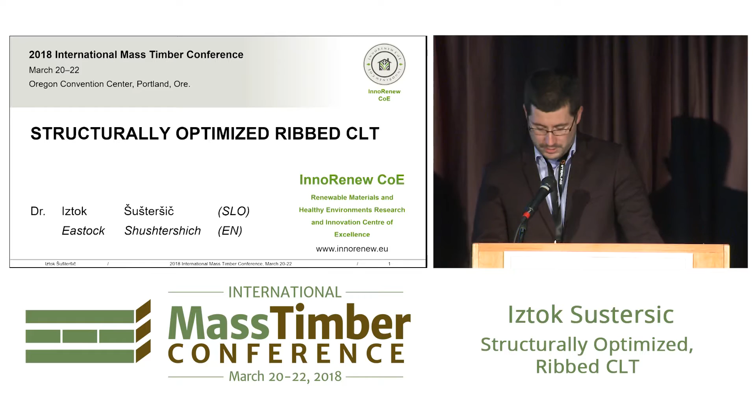I'll start with quite a bold claim. I think that Xlam needs to change at least a bit. I think it needs to be optimized, and I actually think it needs to be rationalized. Saying something like that about a material that was perhaps solely responsible for this mass timber renaissance we've been seeing for the last decade or so is quite daring. Bear with me, I'll try to explain where I'm coming from.

We perhaps should go back first, to the beginning where Xlam actually started, which is now almost 25 years ago, basically in the mid-1990s, sort of as a joint research between the Austrian industry and academia. At that time, timber in Europe was a lot cheaper than it is now. It was more available. The beginnings were a bit slow, but then at the beginning of the new millennium, the whole thing took off quite a lot.

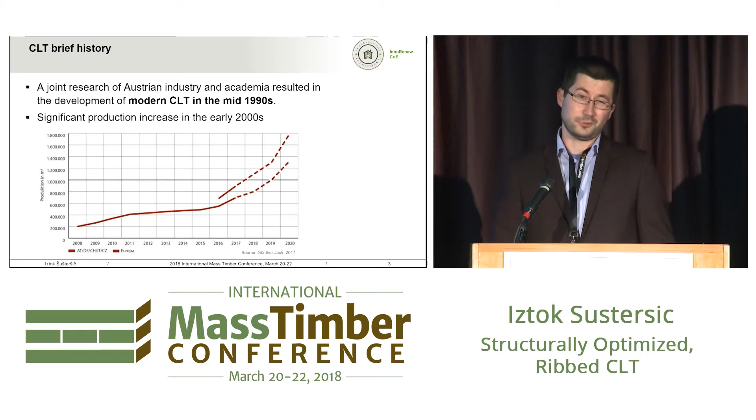If we look just at the latest numbers in Europe, we're seeing that the European producers are probably going to be hitting the 1 million cubic meter mark either this year or next year. So that's a lot of timber. That's a lot of trees also.

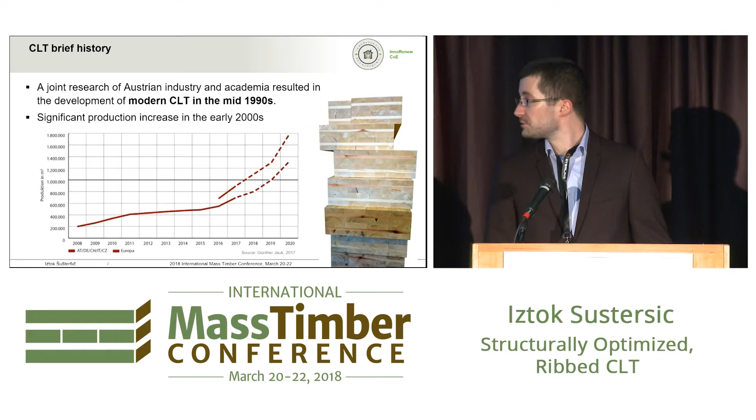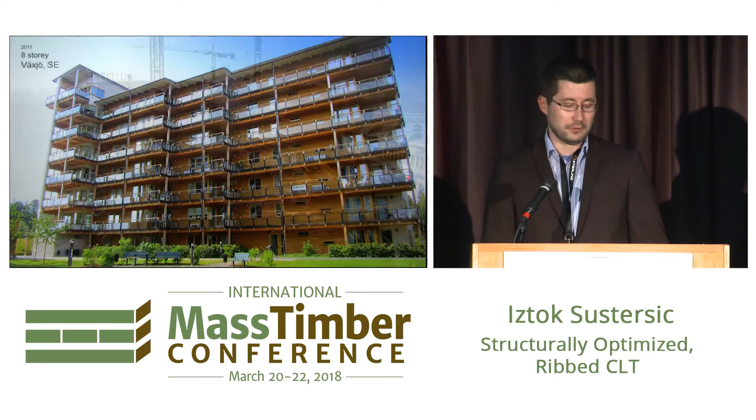The reason why perhaps CLT took off so much, like 15 years ago or so, was because it allowed us to build in height. Perhaps this building was the most prominent one in that perspective, so the first 8-story CLT building in the world, in Växjö, Sweden. And then after that, they just started sprouting all across Europe and the world. 9 stories, 10 stories, that hardly even gets to the news these days. You also have the 17-story one in Vancouver, Canada, the Brock Commons, and the 24-story one being built right now, the Hoho building in Vienna.

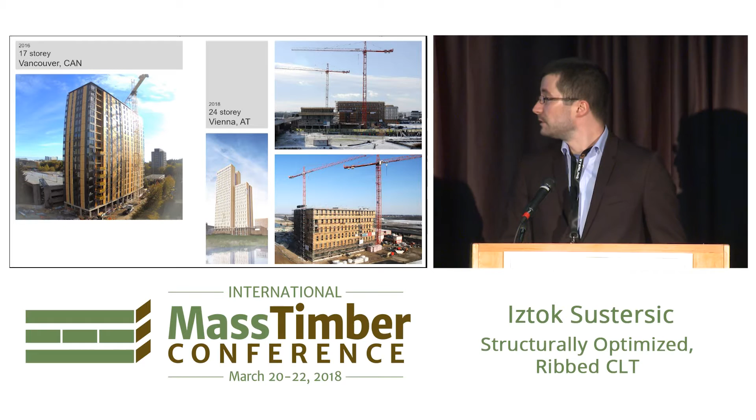I'm slightly cheating with these two because they are hybrids. They have concrete cores, which take the lateral load. But nevertheless, they have quite a lot of CLT within the structure itself. So it's not only that we can build high with CLT, we can also use it for the inner panels. We have a nice, healthy, warm building climate.

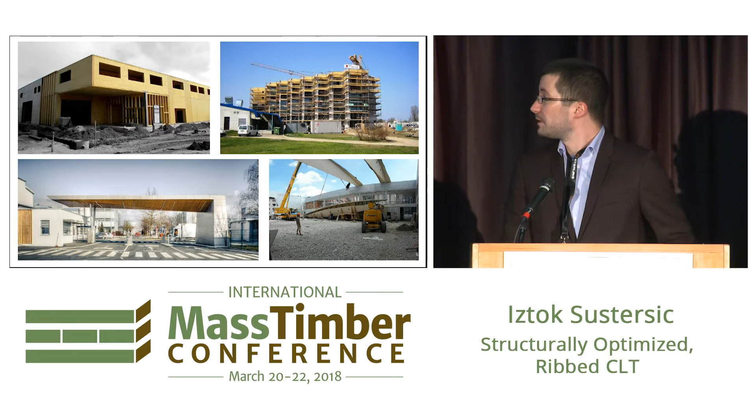We can also use it for smaller applications, but for some more interesting architecture, for structural upgrades in seismically active areas, because it's so light in mass, but stiff on the other side, for cantilevers, for all sorts of things. So coming back to my original question, or my original bold claim, why should we rationalize Xlam?

Well, a medal always has two sides, so we also have to look at the other part. There was a very prominent study made by Johnson and others in 2011, whose outcomes were, in the end, that we will have more of the low-quality timber in the future. We'll be using more plantation wood, and that we may actually see spruce start to run out as soon as 2020. Now, the last one is a bit of an overkill, so we still have some spruce, but we are definitely logging a little bit more than we should.

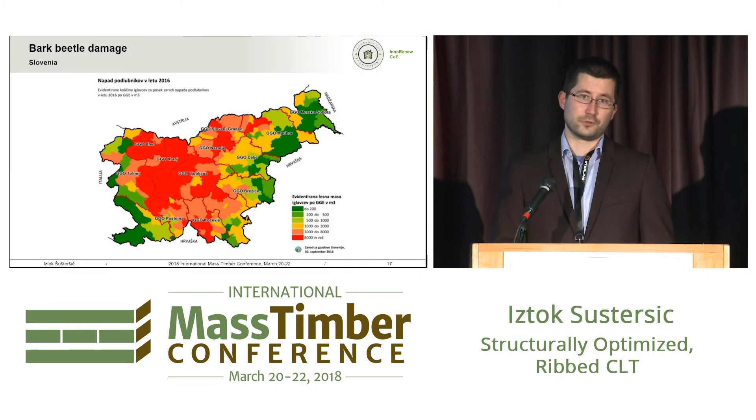So it's not only what we're doing in the forest, it's also what's happening in nature itself. For example, a case from Slovenia, the country, it's actually the 3rd most forest-covered country in Europe, right after Finland and Sweden. That's also the country where I come from, and for that matter, also where your first lady comes from. But putting that aside, 4 years ago, we had one of the worst cases of sleet probably ever. That resulted in this, and that consequently ended in this, the worst case of bark beetle damage in the last 30 years or so.

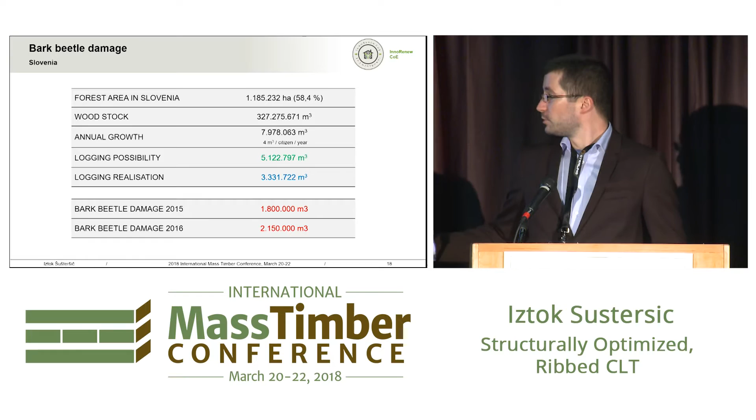Putting that into numbers, we've lost about 60% of our yearly logging realization for the last 3 years straight. I don't have the data for 2017. The word is it's even larger than it was for 2016. So in addition, it's also the timber stock that's changing.

This is a case from Germany. So right now in Germany, we have 70% of softwoods and 30% of hardwoods.

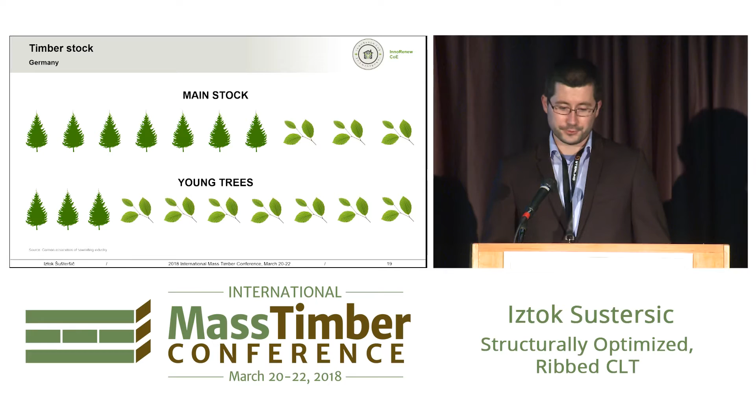But the young trees are quite the opposite. We have 30% softwoods and 70% hardwoods in the young trees. The same case also then results in the prices of timber.

This is the price of spruce and pine for the last 25 years or so, and this is the price of beech, which is actually declining. So, taking from this, we may actually see quite a lot of hardwood being used in the future.

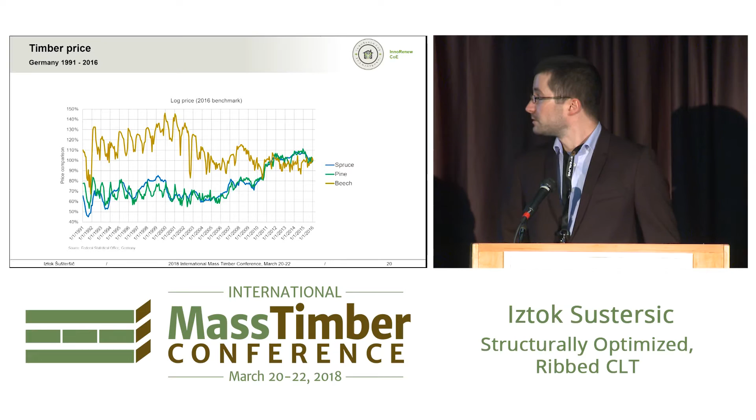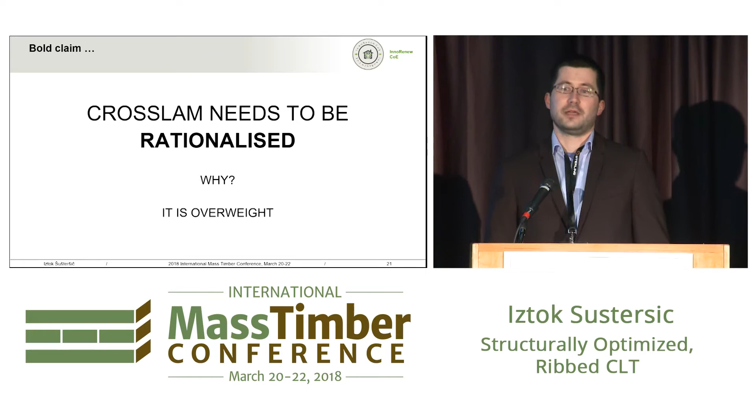But when I say that crosslam should be rationalized, I don't just mean we should change a species from spruce to beech. I think crosslam is a bit overweight, and I think it actually needs to go on a diet. So the question is, what happens if you go on a diet?

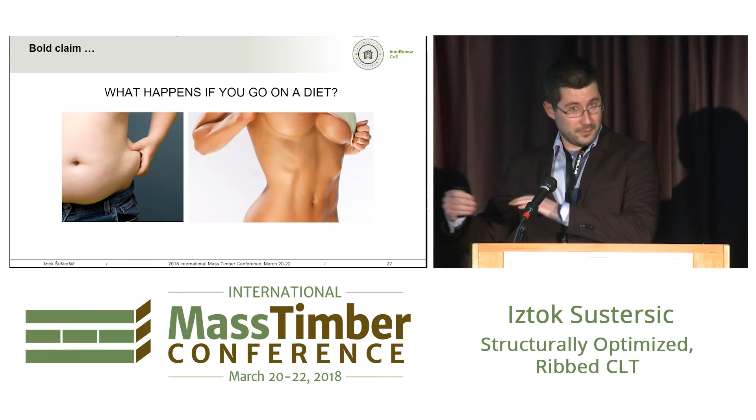Not the upper part, quite the opposite happens in that department, but you can see your ribs. So the trick question is, what happens if crosslam goes on a diet? Yes, it too starts to show ribs.

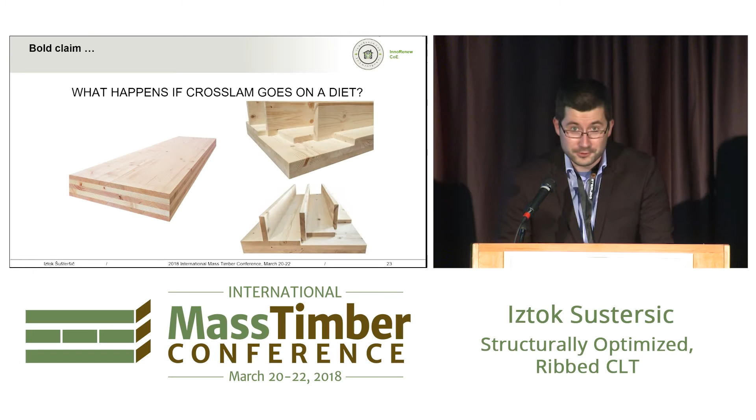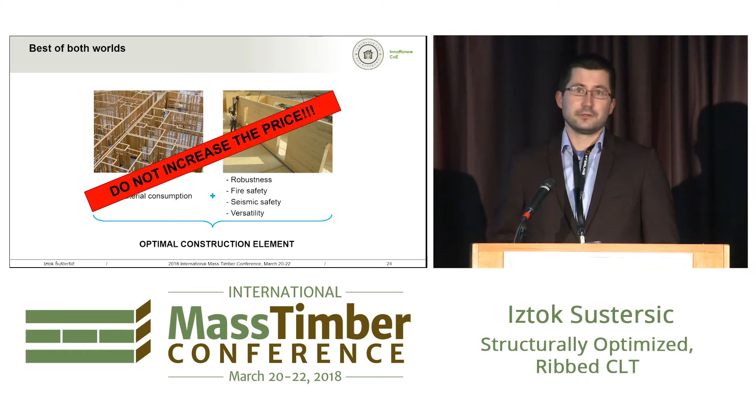So the thing is, when we were trying to come up with this new element, we tried to combine the low material consumption of stick frame on one hand with the robustness, fire safety, seismic safety, versatility, strength, stiffness, etc. of crosslam on the other hand, into this one optimal construction element without increasing its price.

And how to do that? First of all, we had to keep the production cost the same. Second of all, we wanted to use the same materials as for regular crosslam, so basic, simple lamellas.

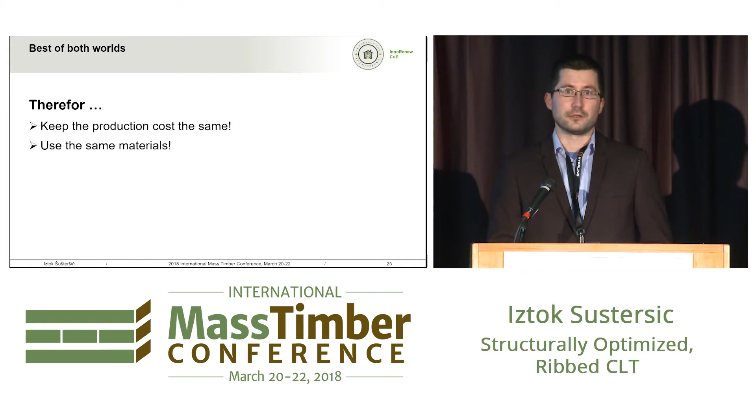Because these cases, this was done before and this is being done now. So taking a CLT slab, combining it with a glulam or LVL, whatever rib, this is nothing new. But the problem is you have to make one, you have to make the other. These are usually not made in the same factory.

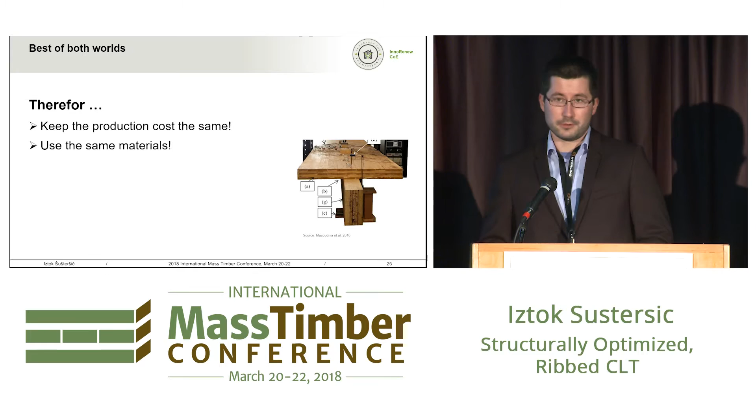You have to bring them together. You need labor, manpower, transport, etc. So this was out of the question.

And second of all, these elements are more useful for larger spans, let's say 10 meters or more. So that would be roughly 35 feet or more.

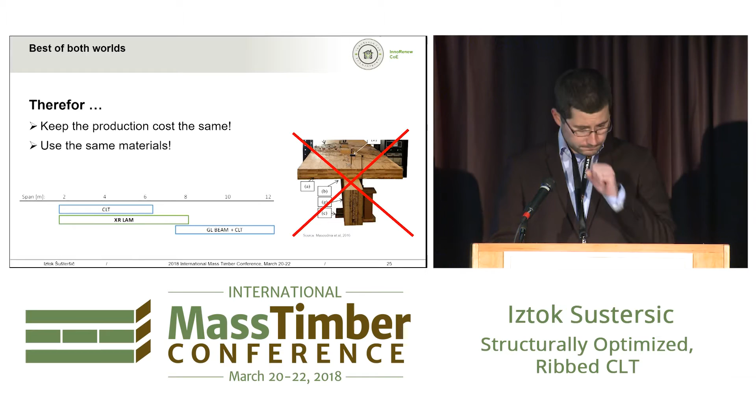And we were aiming for the 6-meter spans, so again roughly about 20 feet or so, where crosslam is actually quite optimal. If you go beyond 6 meters, you can do it without a problem.

The thing is, if you want to fulfill all the serviceability limit states, you're getting quite thick plates and you're not being as rational as before. So sticking with the 6 meters, perhaps trying to push it a little further, maybe towards 8 meters or so.

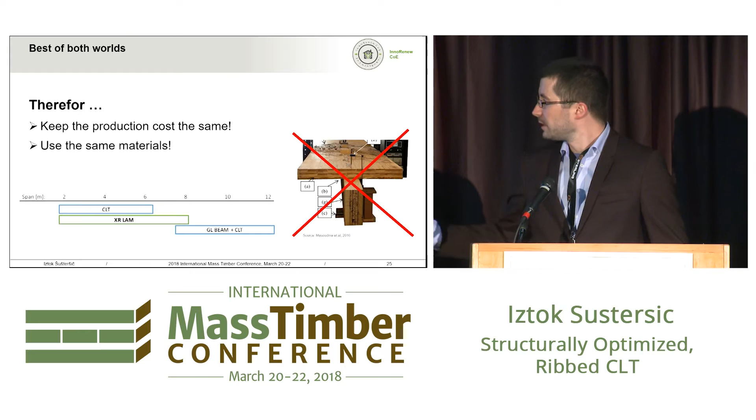And first of all was to develop this one-step production procedure, so how to incorporate the ribs into the main CLT structure.

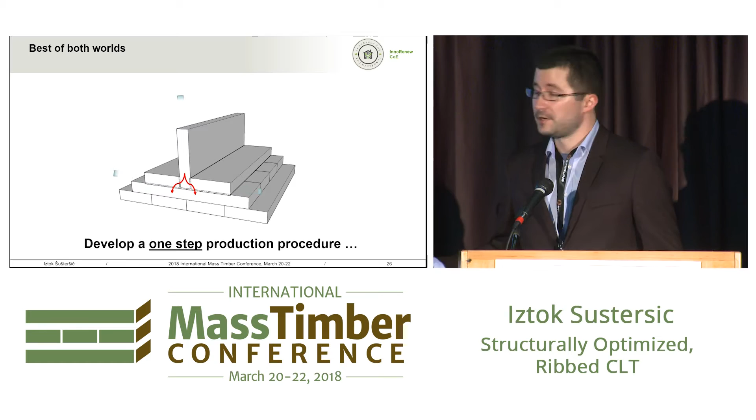Well, we did this by actually using a two-sided pressure, so from the sides and from the vertical direction. In the end you get this very stiff, very robust connection, even if you have very slender and thin lamellas.

Second of all, it was the use of standard lamellas. You can imagine if they're very long, very slender, they can get a little crooked. So if you have this side pressure, you can actually straighten them up and get this very compact and robust structure in the end.

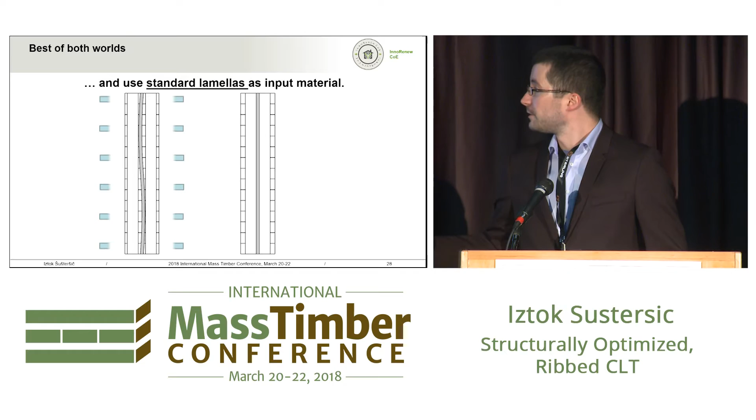So of course we had to put our money where our mouth was, and we made this testing matrix. Altogether, when you combine the cross sections, variations, lengths, and so on, this was about 39 specimens altogether. These were meant for bending.

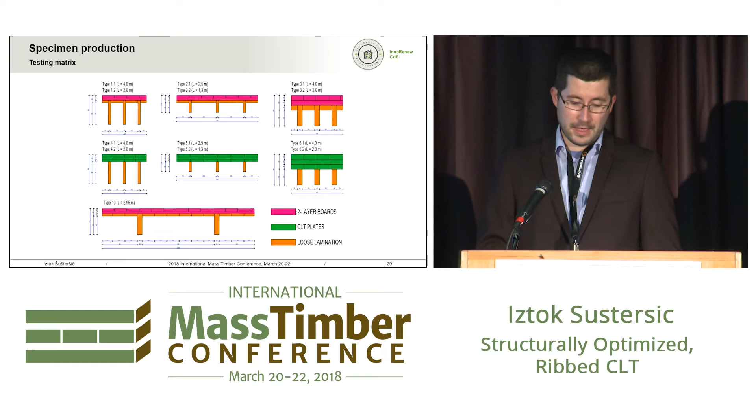This was then meant to be as a wall for buckling, and we made them on a Ledinek X-press. So this is a press that's actually already on the market.

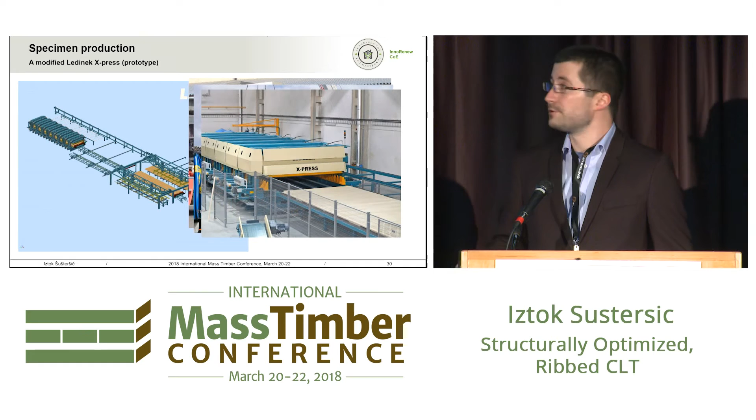It's a modular press. The main thing is that it actually allows pressing from 3 sides already - the main vertical pressure, but then you also get the side pressure and longitudinal pressure as well.

The problem is that all the presses are usually custom made, so they're not lying exactly in the backyards of producers. We were really fortunate that Ledinek had one of the segments - not exactly lying in the backyard, but they had one, and they were kind enough to modify it for us.

So we were able to make specimens up to 4 meters in length and up to 1.5 meters wide.

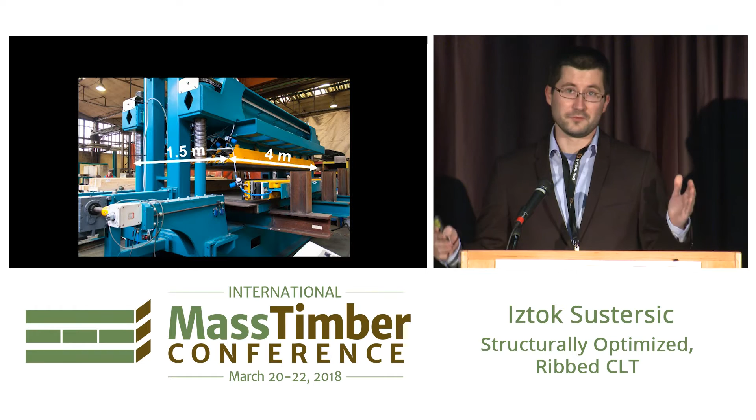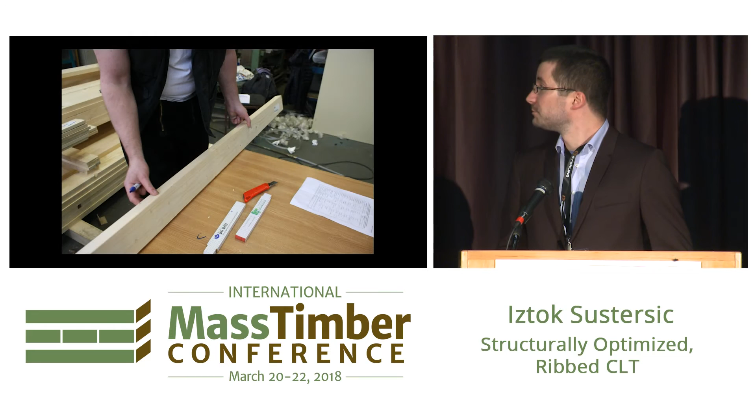So we started with all the procedures for the basic lamellas. First, we had to regrade them all and measure all the properties to get the correct modulus of elasticity, so we knew the properties of each and every lamella. This was very important for later finite element modeling.

After doing that, we had a couple of rejects, but the rest of the lamellas were classified into three different classes: the stiffest ones, the medium ones, and the most flexible ones. We tried to spread the properties across all the final samples so we had as uniform samples as possible. These were little bundles.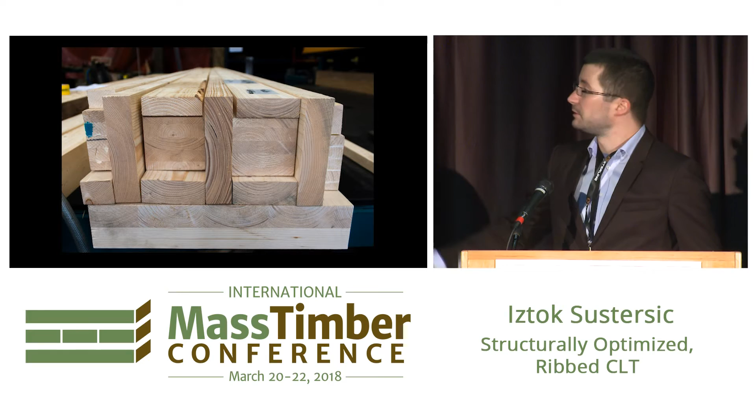You can see the bottom side of the compression plate, the ribs, the flat lamellas, and these so-called dummy elements that ensure the vertical pressure also reaches the flat-lying lamellas and not only the ribs. We used polyurethane for gluing, which is pretty standard in Europe. Then we put our little packages into the press, pressing them from the top and from the side, and they started coming out in all different shapes and sizes according to the matrix I was showing you before.

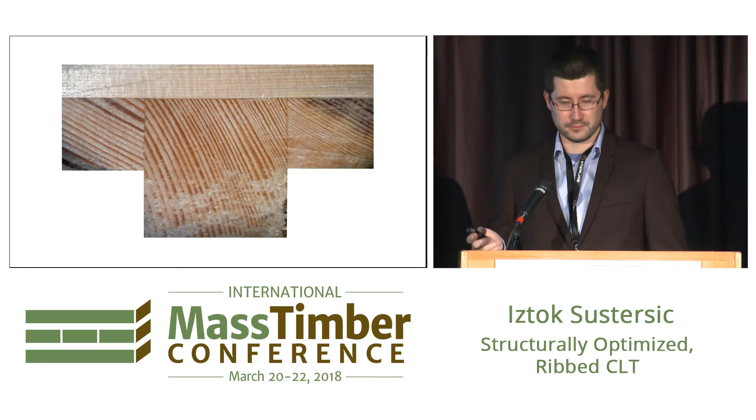So this is a very, very stiff, very robust joint. Even if I have a super slender lamella, even if it's like an OSB plate or whatever, this is a lot easier to put together and to have a stable connection. Because if you try to glue a very slender and narrow lamella directly on the CLT plate, it's going to give you at least some gray hair, if nothing else.

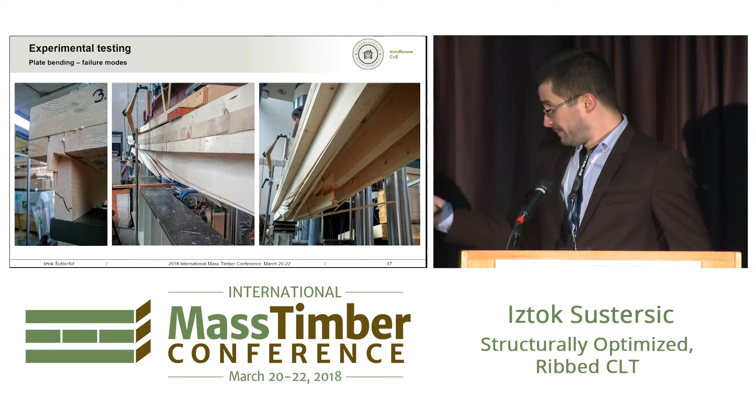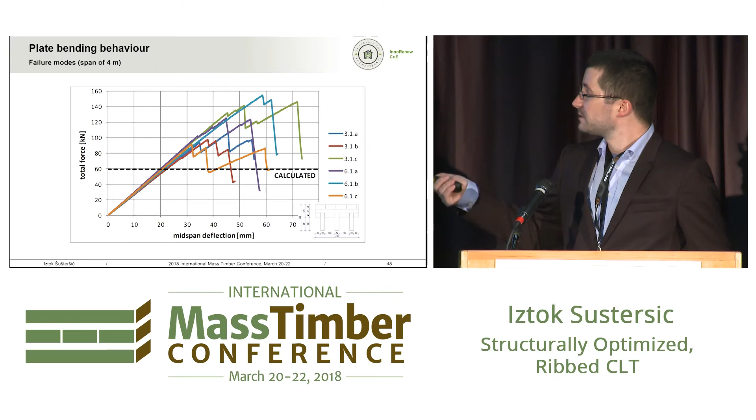If you look at the displacement force diagram, you see this: the load starts to increase, then one of the ribs breaks, the load is redistributed to the other two, then starts to increase again, the second rib fails, and again redistribution, and so on. In the end you get this zigzag pattern of the load displacement curve, basically a sort of ductile post-critical behavior.

This is very uncommon for timber structures in general. Glulam beams, whatever, massive timber - when you stress them, they usually fail pretty much in one go without any sort of ductility, so brittle failure. This was quite the opposite in this case.

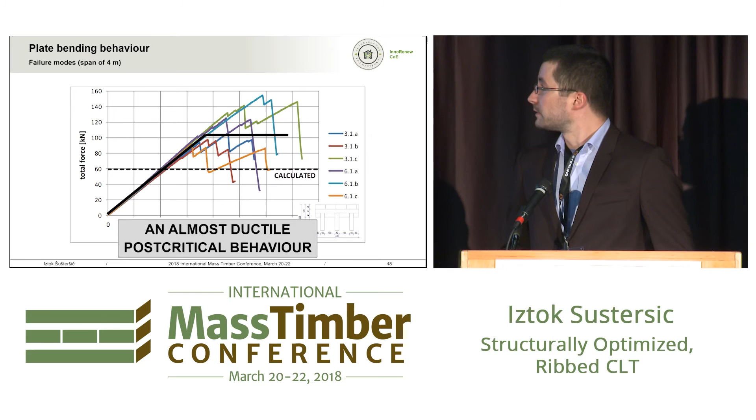One thing we also found out was that there was no distinct shear lag effect. Whenever you have a rib-type plate or any T-shaped section, you always have the presence of shear lag. In our case, the ribs are actually so close together that there is no such shear lag present.

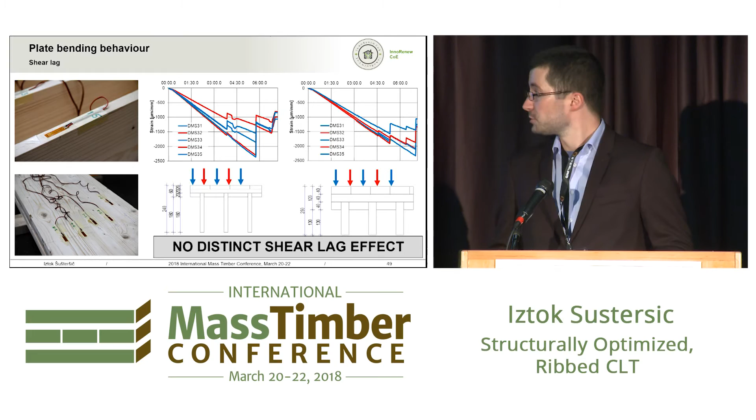There was a difference in the measurement of strains on the top of the compression plate. However, this was more or less correlated to the different stiffnesses of the ribs we were intentionally putting there. So there is no shear lag effect, which means we can use the complete cross-section without any reductions - we can use the full potential of the material.

Okay, coming to walls. This wall specimen was 2.95 meters tall, which is quite standard for Europe because this is the limit for our standard transport, so we don't have to use special lorries. It was 1.25 meters wide, the standard width of OSB plates in Europe. Only the plate was supported, so the ribs only offered buckling stabilization.

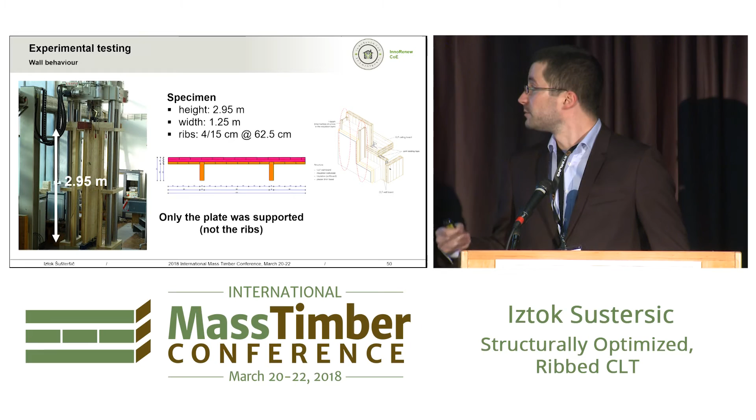Now, speaking of ribs, whenever you're dealing with CLT construction, unless you have a contact facade, you usually end up with some sort of rib or rib-like elements because you need them to carry the substructure of the facade. Normally you have to buy them separately, bring them to the construction site, install them, etc. In this case, they already come within the package itself.

So, coming to testing, this very small specimen, which actually has 30% less timber than a standard 10 centimeter CLT plate - the most common plate used for walls in Europe - could take 1,100 kilonewtons of force. If you translate that into length meters, that's close to 100 metric tons per length meter of wall.

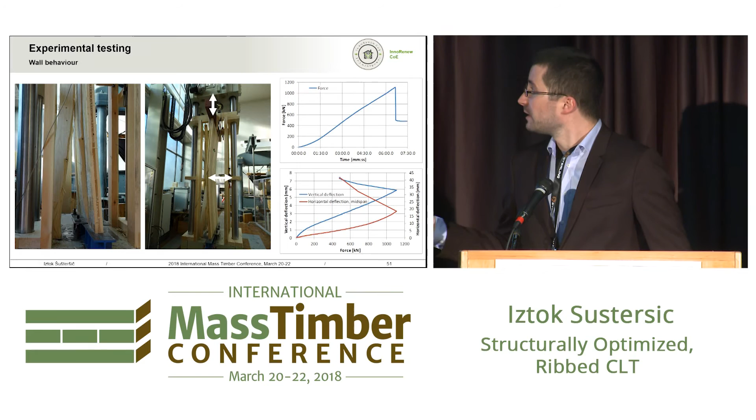That's really a lot considering the whole material ratio towards the force thing. So the ribs, in the end, this was the final state when they actually ripped out of the structure. But the main thing was the whole behavior was very controlled, without any sudden buckling, which is quite the opposite of what you'd get with any other type of wall or column system.

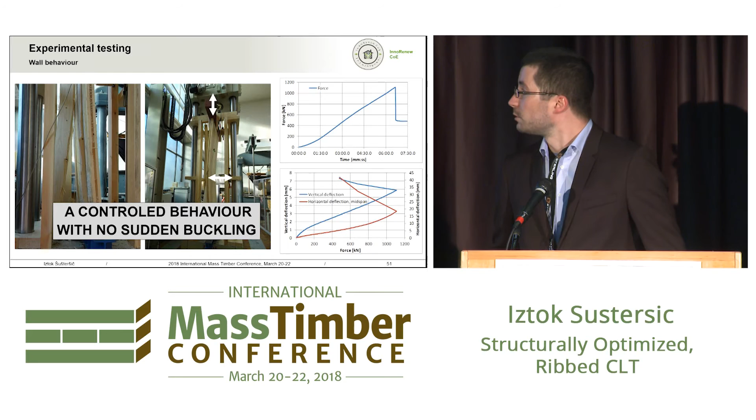Putting some numbers together, let's look at the comparison of timber consumption for standard CLT plates compared to the ribbed variant.

If we're talking about roof plates, where the governing criteria is either strength or, in most cases, displacement, we can save up to 50% of timber compared to standard CLT while still keeping the same performance. If we move to the floor plates, where the governing criteria is usually vibration, we can save up to 40% of timber compared to standard CLT.

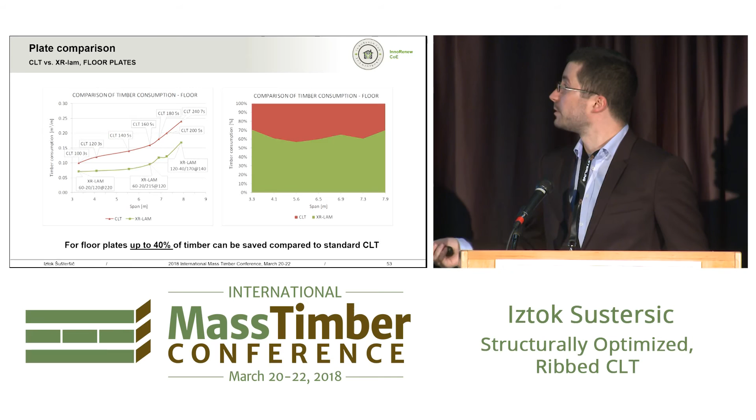Coming to walls, we can save at least 30% of timber. However, this is just a numerical comparison. If we have a 35% higher load, we can still save 30% of timber. If we move to the fire load case, this is performing about 5 times better than standard CLT, because you're actually using the whole cross section and you have the massive side orientated towards the fire. So this was also quite good.

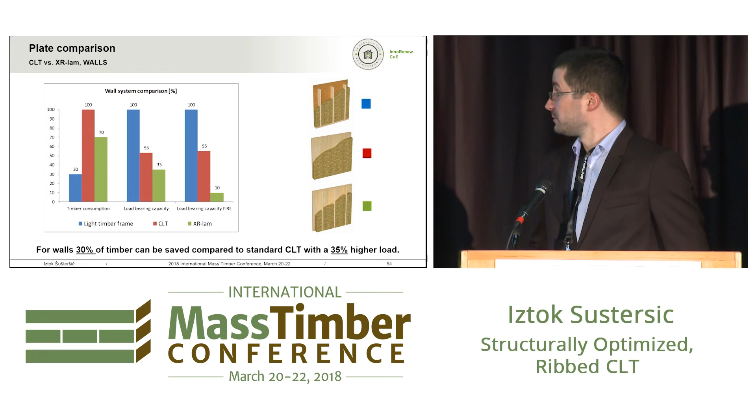And now coming to the production line. So all what I was explaining before is pretty much in vain unless we can actually make these plates. This is, for example, a production line that Ledinek is making. This is their standard cross press. You can see it's a very small part of the whole factory, from CNC machines, finger jointers, and so on. So this production press actually gets a whole new addition.

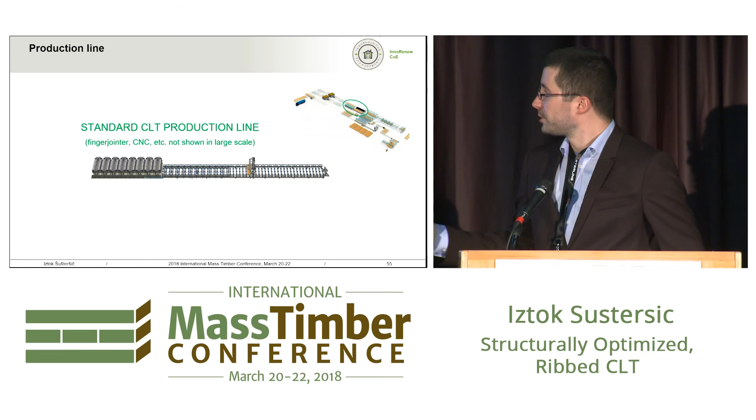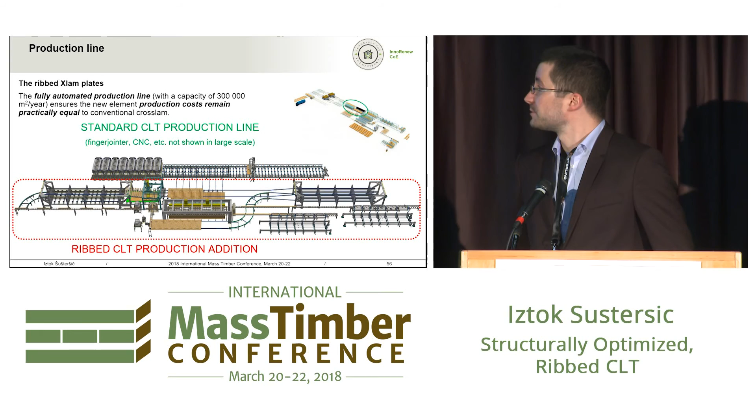This is where you actually make the rib plate, so you can have a combined production of making standard CLT combined with ribbed CLT. The whole production is fully automatized. It has a capacity of 300,000 square meters per year. That's about 15% less, let's say, if we would translate that comparing to standard CLT. Nevertheless, we have quite thoroughly established that the production cost for the rib plates would remain pretty much the same as for standard CLT plates.

Okay, summing it all up. If we have these rib plates, we keep all the benefits of conventional CLT. If we have this dedicated production line, we keep the production costs the same. For floor plates, we save up to 40% of timber compared to standard CLT, and for roof plates we save up to 50%. We save at least 30% of timber for wall elements, which also have a higher load-bearing capacity, and they have a very huge potential for multi-story buildings. And since we have the ribs already incorporated in the main structure, we also save on the outer envelope building costs.

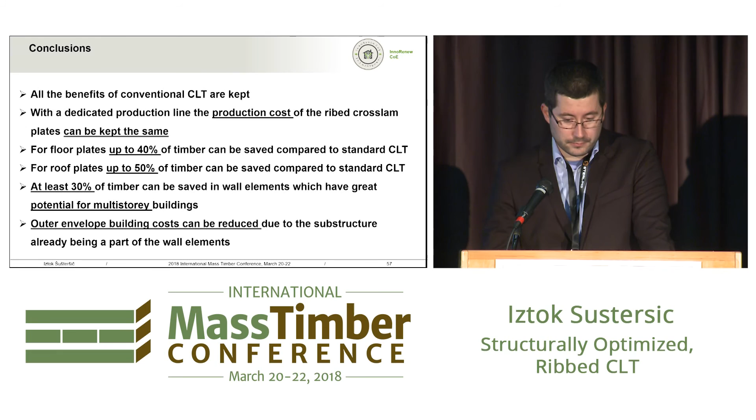All the results that I presented so far are originating from the hybrid cross-laminated timber plates project, which was performed under the WoodWisdom-Net, one of the Horizon 2020 projects. I would like to thank all the partners that took part in this project.